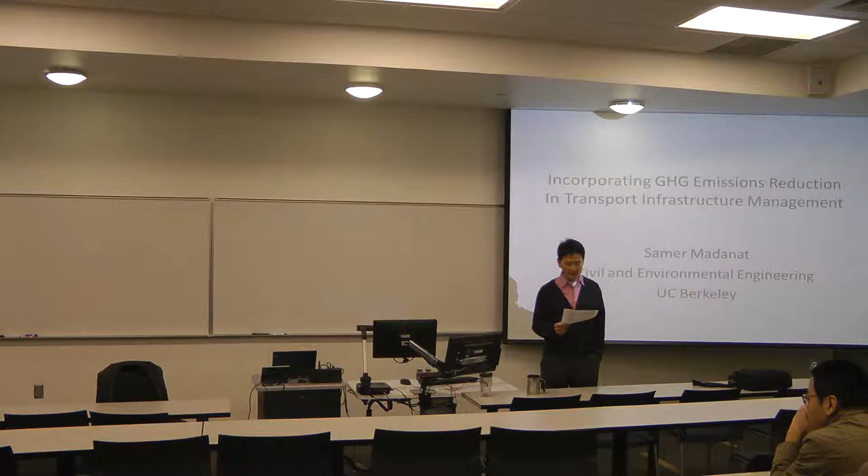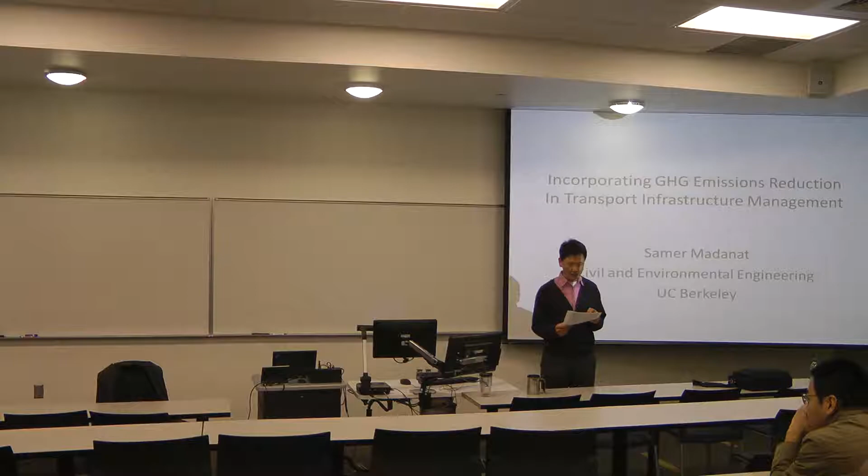From 2001 to 2010, he served as the editor-in-chief of the ASCE Journal of Infrastructure Systems. He is a member of the editorial board of several technical journals. Many of his former students are faculty members at universities in the U.S. and abroad. With that, please join me in welcoming Professor Madanat to the talk.

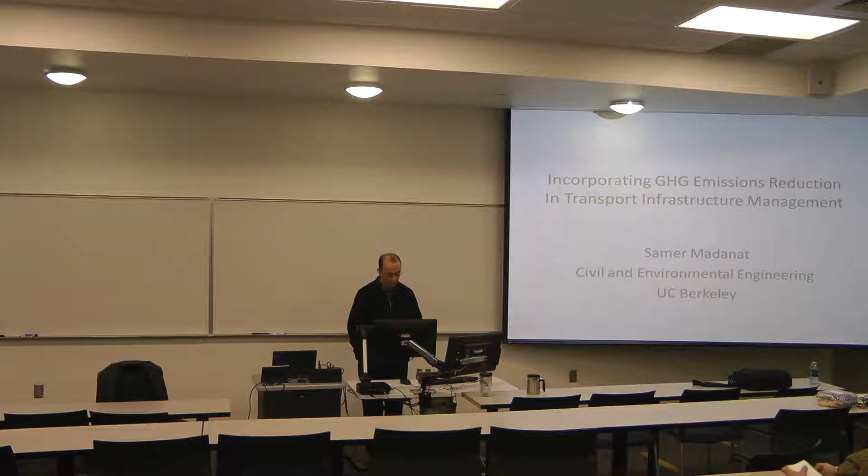Just as a point of clarification, I'm no longer director of the Institute of Transportation Studies. I stepped down this summer. Okay. Because I found that being both department chair and director of a large research institute led me to do both jobs poorly, as opposed to just one job.

All right, so when James invited me, he thought it would be interesting maybe for me to describe some of the more recent research I've been involved with collaborators at UC Berkeley at the intersection of transportation systems and sustainability concerns. This is part of a major research effort in the UC system, not just at Berkeley, in response very much to state priorities as well as global concerns having to do with greenhouse gas emissions and energy consumption.

There's been significant work done in the transportation sector on reducing greenhouse gas emissions through alternative fuels and different vehicles. There's been less work done in trying to reduce the impacts of civil infrastructure. And the type of infrastructure specifically I'm concerned with is that of transportation infrastructure, primarily highways. So the research that I will be describing looks at ways in which, through better management of existing highway pavements, it is possible to reduce greenhouse gas emissions and to find ways in which greenhouse gas emission reduction becomes part of a decision-making paradigm for the management of existing highway pavements in the state of California specifically, but applicable certainly more broadly.

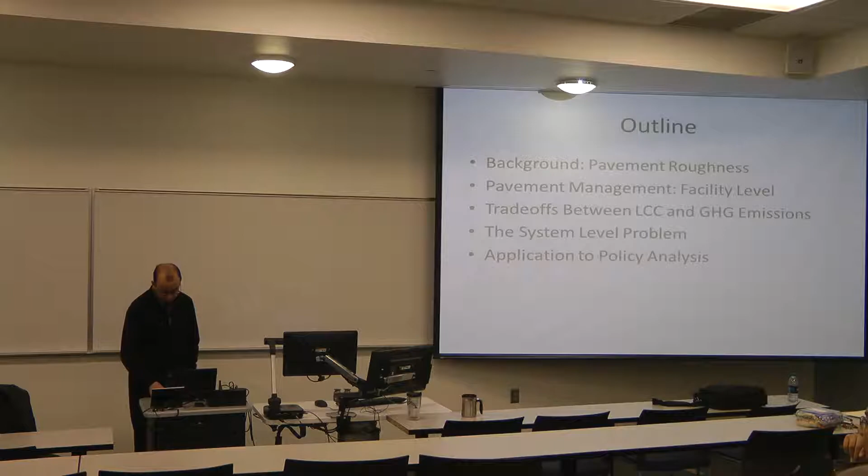So this is what I'll try to describe. The abstract of my presentation had a second component where I was going to look at a similar approach in the design of urban public transportation, but James advised me that I had less time than I thought, so I'll leave that aside and I can refer you to additional papers. So I'll talk a little bit about pavement roughness, which is very much at the heart of that greenhouse gas emission question.

Describe a little bit what pavement management is, starting at the facility level, and then bring in greenhouse gas emission as part of pavement management. First, again, facility level, then we move to the system level problem, which is the problem that state agencies face with hundreds of thousands of kilometers or lane miles, and some policy analyses that we can do with the framework that we developed.

This is a list of references that describe our work in this, and the first group of papers are relevant because these are the kind of optimization approaches that we have used in this work. Many of them were developed many years ago as part of our emphasis at that time on life cycle cost minimization. And the last two are more focused on bringing in life cycle impacts as well as life cycle costs into the decision-making paradigm.

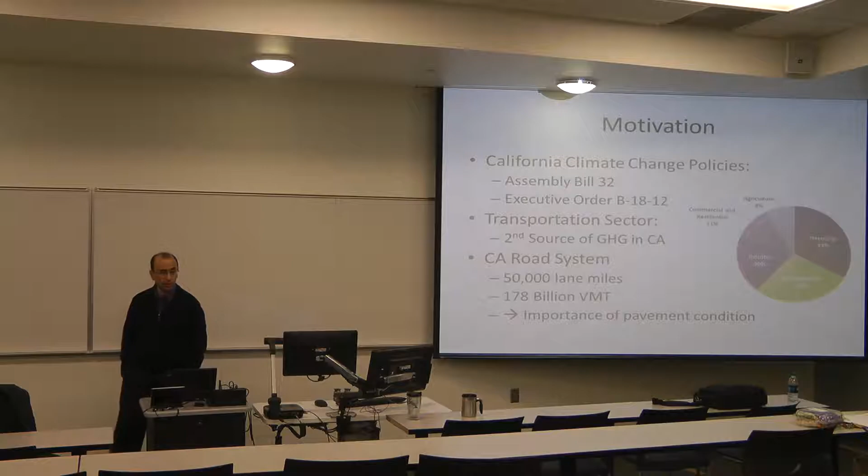So the motivation I described briefly, I mentioned the priorities in the state of California. These are law in the state of California. Assembly Bill 32 has mandated that the state of California should reduce its greenhouse gas emissions by 2020, so only in 5 years, back to 1990 levels. And this is law that all the state and in general, all public agencies, cities, municipalities, and the private sector are supposed to do their part in. There's an executive order from the governor that took this and provided additional details and additional mechanisms for making that law applicable, having to do with things like cap and trade, for example.

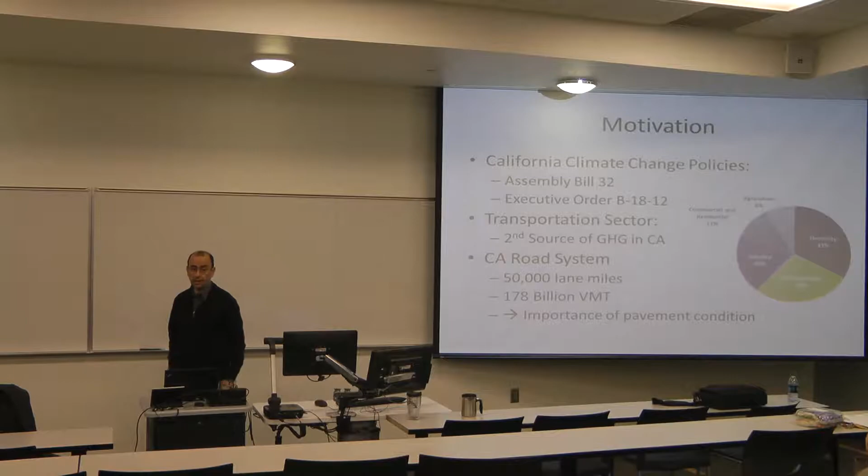Now, why is that relevant to Caltrans and to transportation? Caltrans is the California Department of Transportation, and the transportation sector in general in California is the second largest source of greenhouse gas emissions. In the US, it is the third as a whole at the national level, but in California, with its very extensive system of highways and very high volumes of vehicle miles traveled, VMT, it is actually the second largest.

So, as I said, at the heart of all of this is something we call pavement roughness. Now, highway pavements have a number of distresses and failure mechanisms. There are things like cracking, raveling, rutting, potholes, which are really an extension of cracking and raveling. All of these matter to state agencies when they're making decisions about maintenance, rehabilitation, and reconstruction.

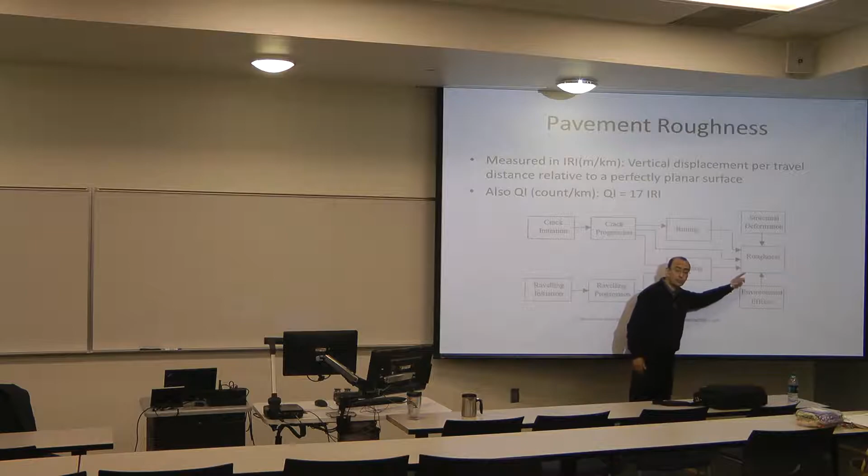But the most important measure of performance is really roughness. Roughness is an aggregation of all of these things. And it matters because this is what affects user costs the most. In particular, and of great interest to us, roughness matters very much to fuel consumption. It of course matters to things like comfort, vehicle wear and tear.

In the case of agricultural products, it leads to potentially loss and damage and significant economic losses as well for very high levels of roughness. But most importantly, in our context, is fuel consumption. Now, roughness is affected by a number of things. The structural characteristics of highway pavements, environmental effects will play a role, like precipitation, freeze-thaw cycles, etc.

Now, roughness is typically measured in most countries, including in the US and most states, in IRI, that is the International Roughness Index, either in meter per kilometer or inches per mile. And it's described essentially as the vertical displacement per travel distance relative to a perfectly planar surface.

Another measure of roughness, which is less used nowadays, is the quarter car index, and they're somewhat related. There's this approximate relationship of 1 QI is 17 IRI, or rather, no, it's 17 times IRI. So 1 unit of IRI is 17 units of QI.

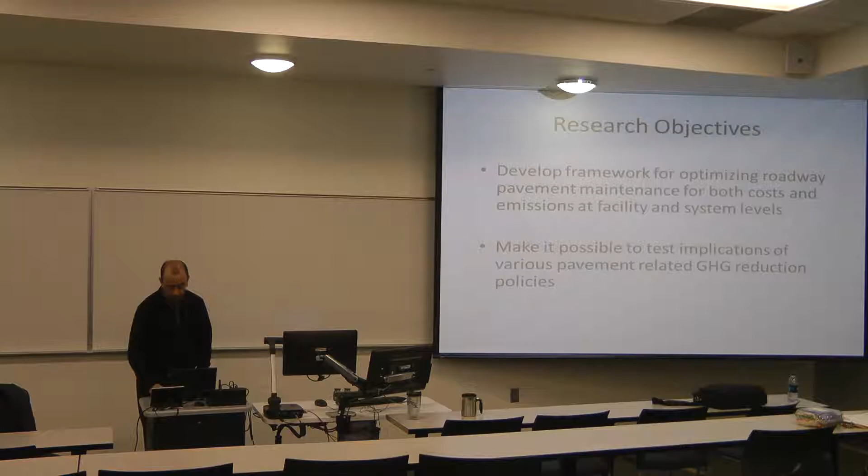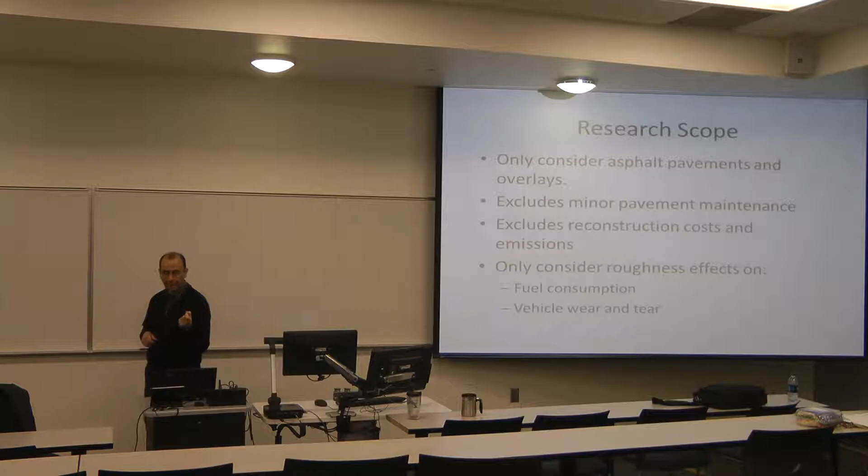So our objectives: we develop a framework that we can use to do some policy analysis, through which we can identify various means of achieving greenhouse gas reduction from the transportation infrastructure. The scope, to be precise, we're only looking at asphalt pavements, not concrete pavements, the black top, not the white top. We're not considering minor pavement maintenance or reconstruction.

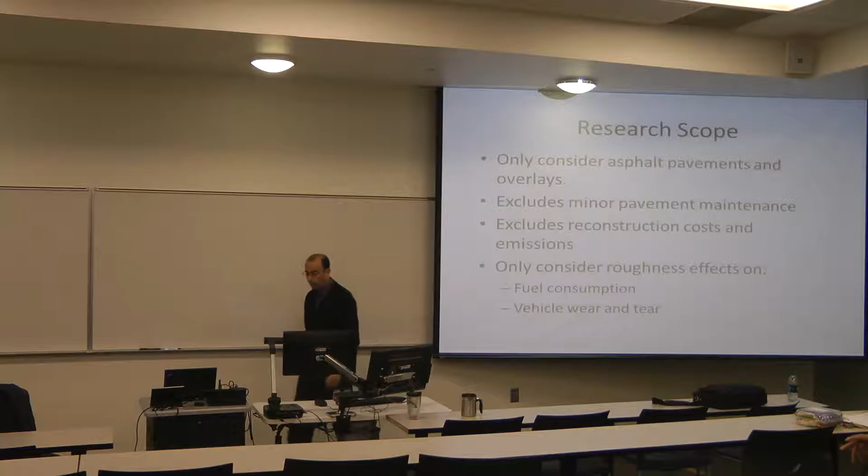Reconstruction is a big deal, but it's done very, very infrequently. And so, though in our current research we're actually not looking at reconstruction, we're focusing exclusively on overlay, not the reconstruction of the entire structure, right? And when we look at the roughness effect on the vehicles, we're looking at fuel consumption and vehicle wear and tear. Other things like comfort are not really quantified.

So, where do greenhouse gases emanate from? Typically, in civil engineering, our focus has been on tailpipe emissions. Now, while tailpipe emissions are an important part of the total production of pollutants, when one looks at greenhouse gas emissions and criteria pollutants, one needs to look at the entire supply chain of various phases of the life of a pavement and a vehicle.

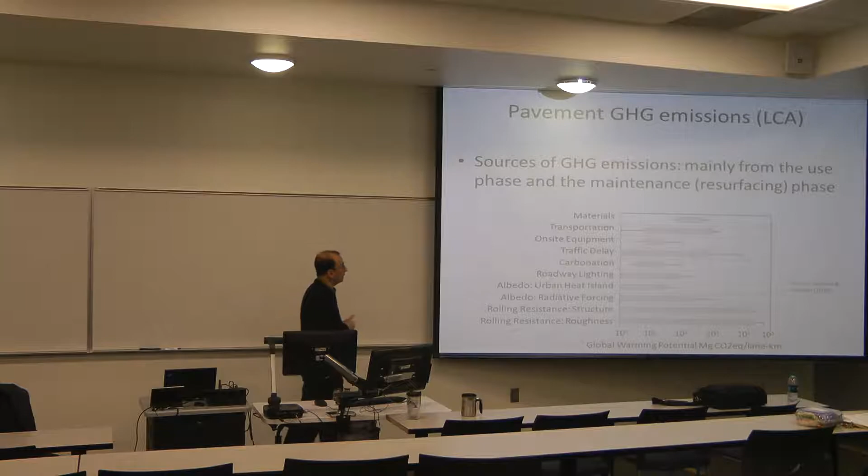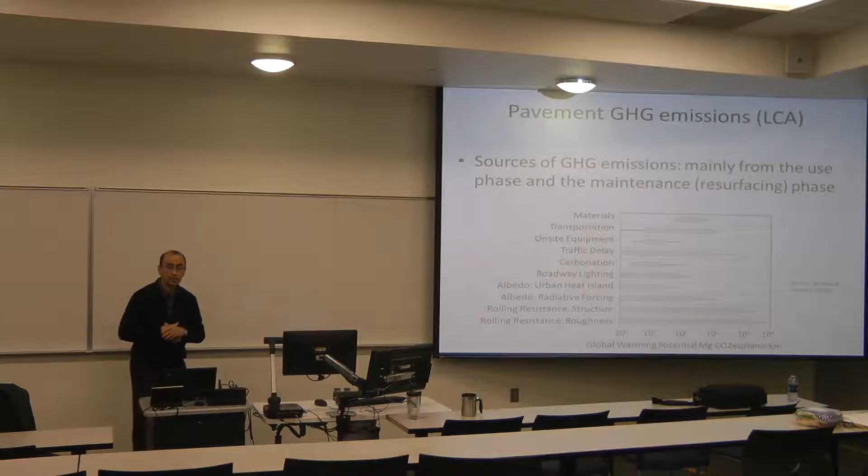So these are various sources of greenhouse gas emissions, mainly from the use phase, but many earlier, before even the use. That is, it's not sufficient to look at a pavement as it exists now, but to look at the entire process of materials extraction and production, all the way until the use phase, and in the case of vehicles, what happens to those vehicles after you no longer use them.

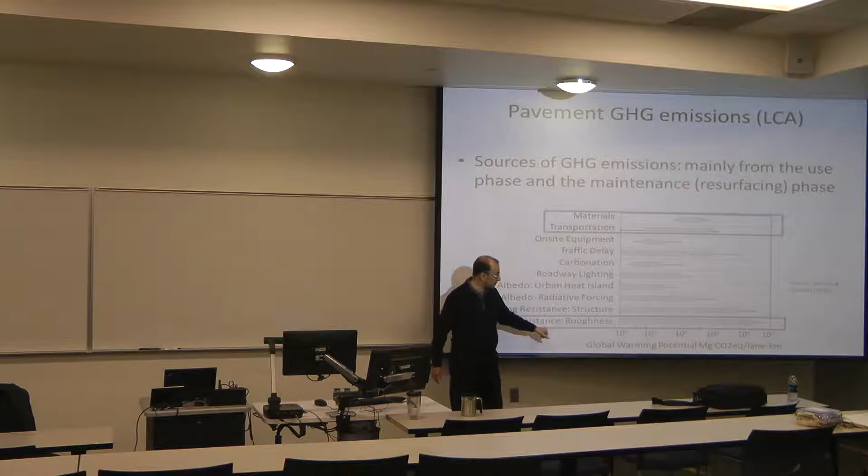Now, this is from the work of Santero and Horvath at UC Berkeley, the biggest sources of greenhouse gas emissions. The materials used, so the extraction and production of materials used for the construction and overlay of pavements, and their transportation from their sources to the sites. So this is on the overlay, on the agency side. On the user side, we're going to focus essentially on rolling resistance and roughness.

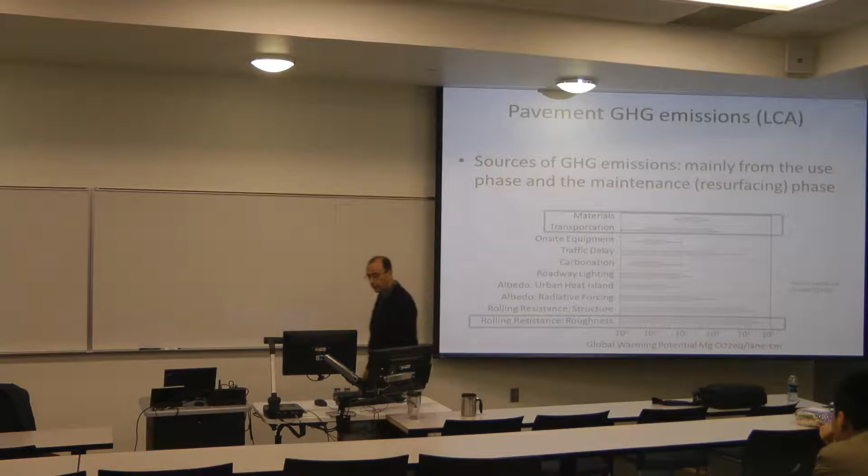Just to point out, this is a logarithmic scale. So these smaller things here are not very significant. And there are other significant things, for example, the structures. This has to do with vehicle tire to pavement interactions, dynamic load, and how the pavement itself is modified by the application of loads. While important, it is not the roughness question, and this is not something we're going to consider. All right, so that's the big picture.

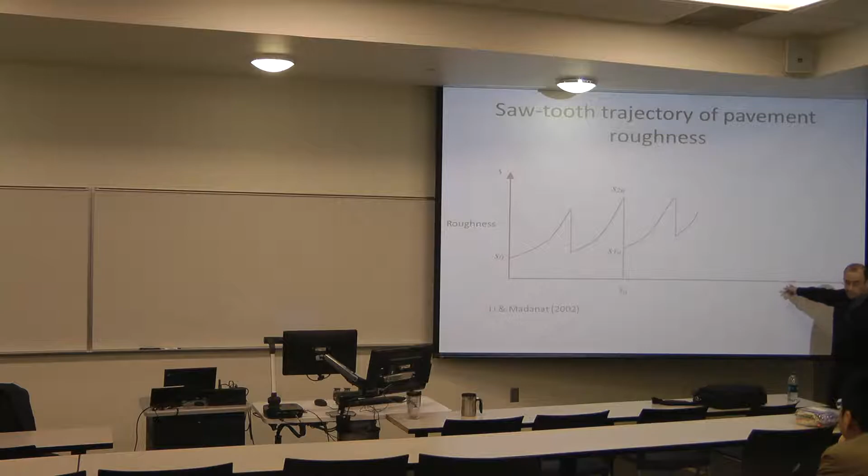The objective is a minimization of life cycle costs only, LCC, over either a finite or infinite horizon. LCC here includes the entire series of user and agency costs. This is a kind of traditional, typical sawtooth curve showing roughness progression over time. Roughness is on the y-axis, and this is either time or the accumulation of loads. Roughness increases, you do an overlay, it decreases, etc.

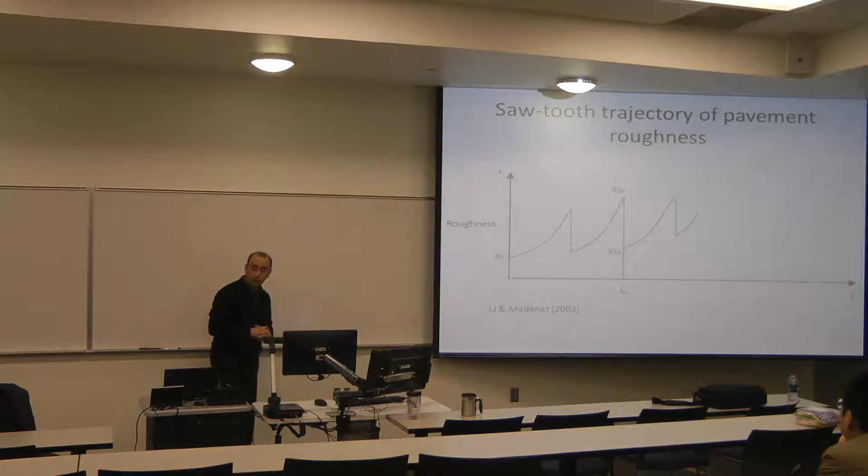So the question is, what is the threshold? For example, what is that number, S2N, at which you overlay? And how much should your overlay be? That is, how low can you come? You can never go back to a new pavement. An overlay does not bring you back to that. You need reconstruction for this. But how low can you get? So either how often do you do it, or what is the threshold, and then what's the intensity?

So this is a standard nonlinear minimization problem. Let me show the components and go through the notations. Basically you're minimizing the sum of the user cost integrated over time plus the agency cost associated with those overlays. You have a deterioration model, which is that first constraint, something that describes how the pavement roughness increases with time and as a function of the current state. You have an improvement function that describes how much down you can go depending on thickness and some initial conditions.

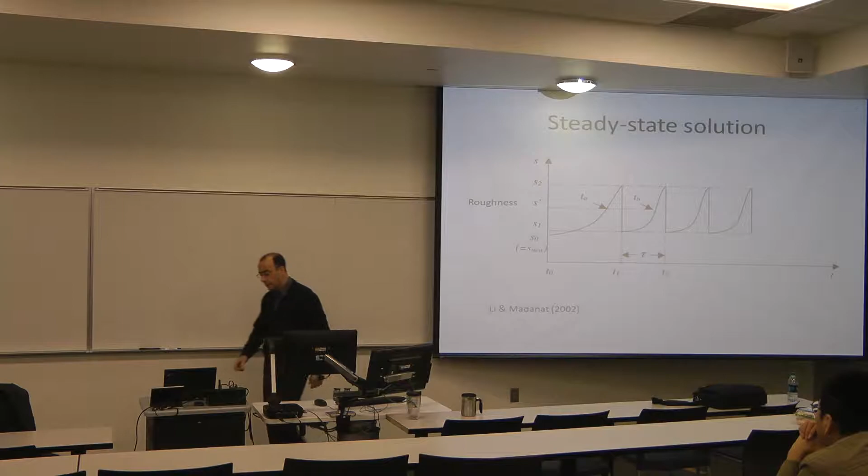The reference at the bottom shows the solution of this problem. For an infinite planning horizon, not surprisingly, you end up with essentially a steady state solution after the first resurfacing. It identifies for you S2, that trigger roughness, for different types of pavements, of course, and it also identifies the level at which you should resurface. Let me actually skip this.

A major insight from this research is that the optimal strategy turns out to be to resurface with a fixed intensity. This is again for steady state conditions, so constant traffic over time, no traffic growth, simplifications of this nature. You resurface with fixed intensity whenever the pavement condition reaches a specific threshold, and the intensity you use is the one that achieves the minimum possible roughness, because technological constraints prevent you from getting essentially to a new pavement condition.

We also found, this is a slide I skipped, that the optimal solution turns out to be quite robust to uncertainty in the deterioration model. And that's an important result because much of pavement management systems today are actually based on probabilistic deterioration models, which is good. But for this particular problem, which is a small part of PMS, or pavement management system, that is not so important.

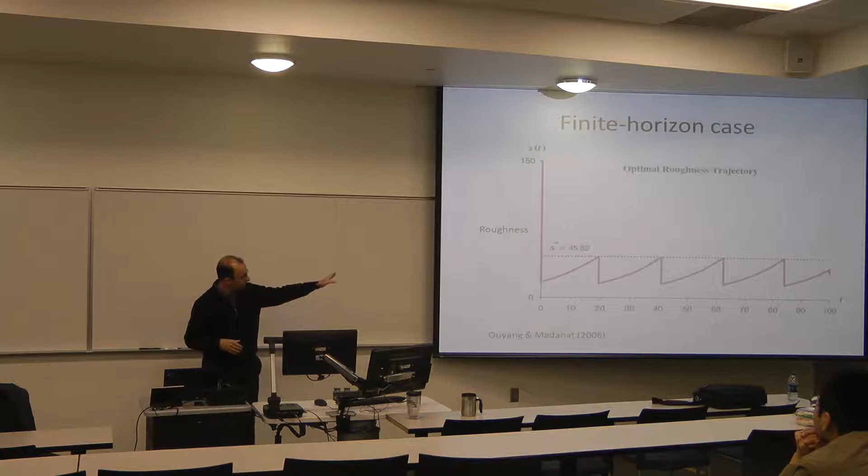There's an equivalent problem with a finite planning horizon, described in the reference at the bottom here. And the insights are very much the same. That is, you do end up with a steady state solution, except at the beginning and at the end. And there's also a trigger roughness, and you resurface with a fixed intensity, which leads to the maximum possible reduction or the minimum resulting roughness. So again, there's robustness to uncertainty. Right. So this is how we go about coming up with these optimal policies, that optimal trigger roughness.

Now let's bring in emissions. So we said in the case of cost, there's a trade-off between agency and user. In the case of greenhouse gas emissions, there's also a trade-off, which is somewhat similar. So if you have on the x-axis the overlay interval, that is the interval between two successive overlays, and you look at CO2 equivalent emissions on the y-axis, the longer the interval between overlays, the roughness emissions are going to increase.

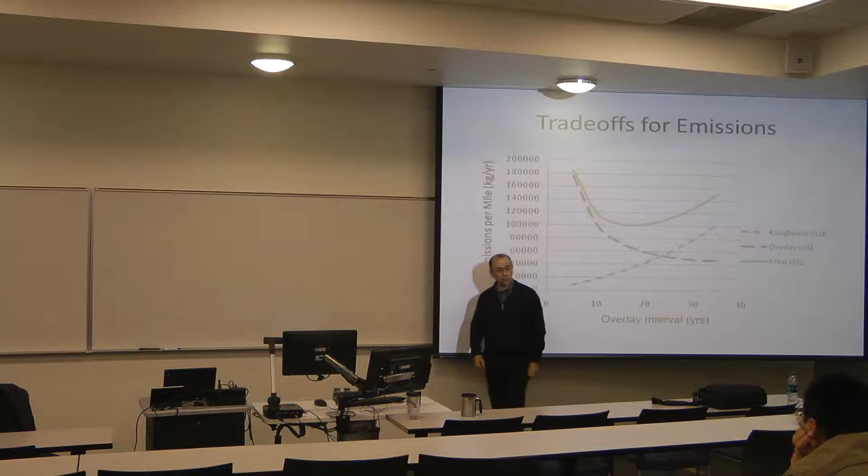Right? That is, if you do overlays every 10 years, your roughness is never going to grow very much, and therefore user emissions are not going to grow very much. But as you extend the period between overlays to something like 30 years, then the user emissions obviously are going to increase, while the agency emissions obviously are going to decrease. Somewhere in the middle, there's a sweet spot, and if your only objective in life is to reduce CO2 emissions, you would go to that global optimal, and you would use that as your overlay interval.

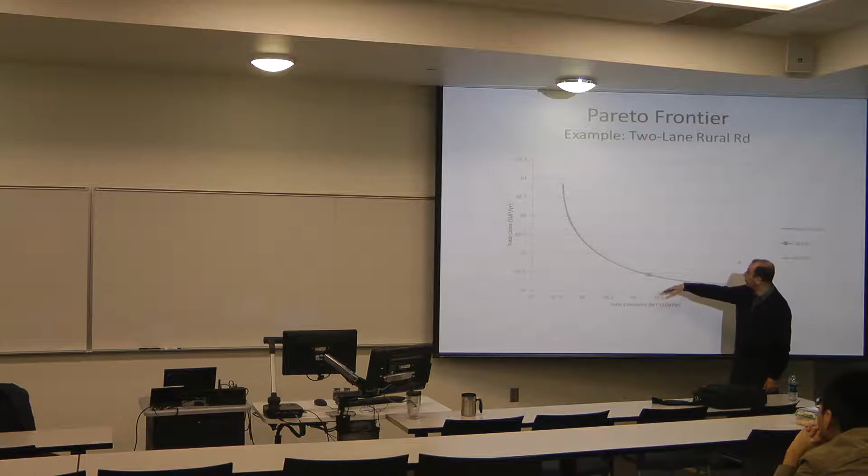And the Pareto frontier is described here with emissions on the x-axis and costs on the y-axis. And what the frontier shows you is the set of optimal solutions in that optimal span, right? So essentially you can never be below that frontier. This is the best that you can do, but you can certainly be above. Now we applied this concept to a very specific two-lane rural road in California, and what we find is that Caltrans happens to be doing a hell of a job. They fall on the frontier, at least with their current resurfacing policy.

I always like to show this slide first when I go to Caltrans to put them in a good mood.

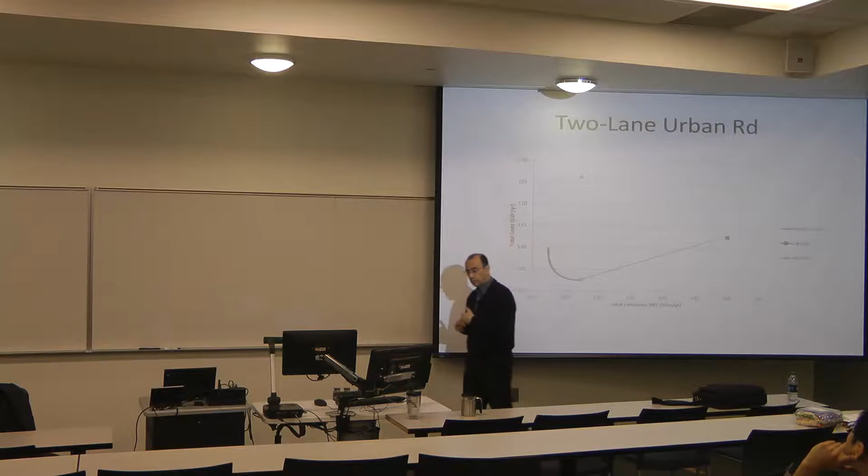Now it's important to realize that Caltrans actually doesn't use an optimization. They have this threshold of 2.7 meters per kilometer. Right? And so that threshold is not optimal, whether in terms of cost or in terms of emissions. The policy they used to have earlier isn't much better, but maybe somewhat better.

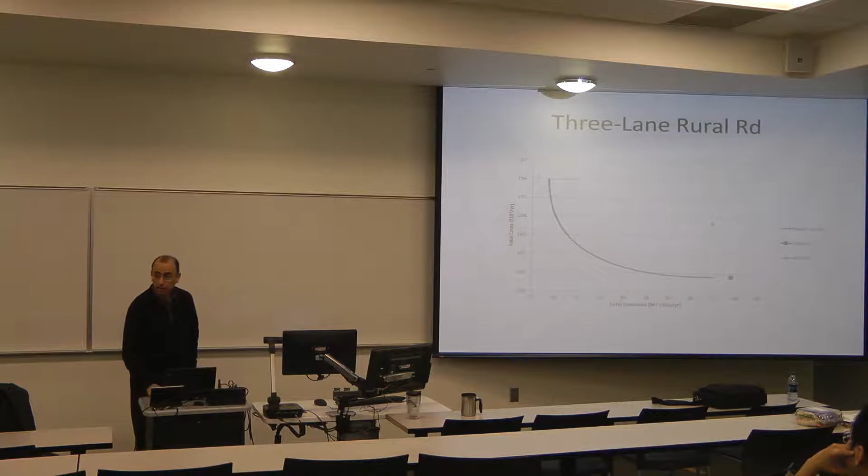Same kind of observations when you're looking at 3-lane rural roads. Again, Caltrans does very well there. If you extend that frontier, they're on it. And again, in urban roads, it's not a good solution.

So, all right. So this is kind of how you bring in greenhouse gas emissions at the facility level. Caltrans really doesn't care about this because they're not concerned with managing individual segments, but with an entire system of pavement segments, tens of thousands of kilometers.

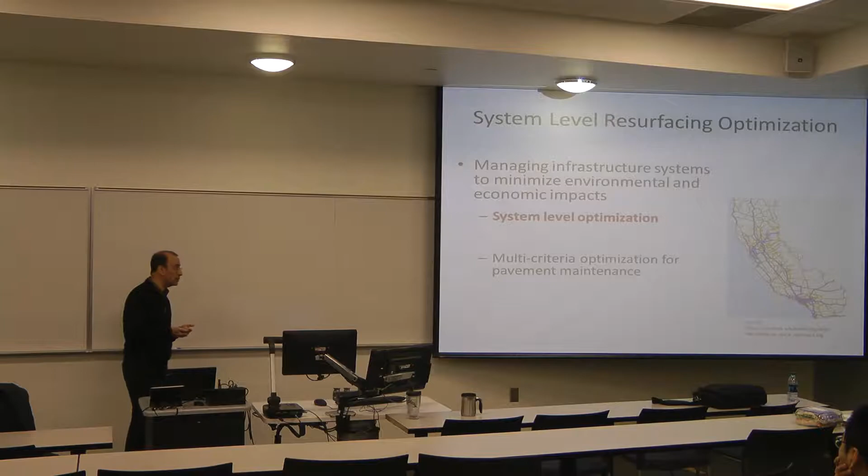And the problem is different because it's not sufficient to just take the optima from each segment and collectively use them, simply because you have system-wide constraints, in particular budget constraints, that make it such that the collection of optimal solutions is not itself optimal, right? Even the budget constraint. So this is a kind of constrained optimization problem.

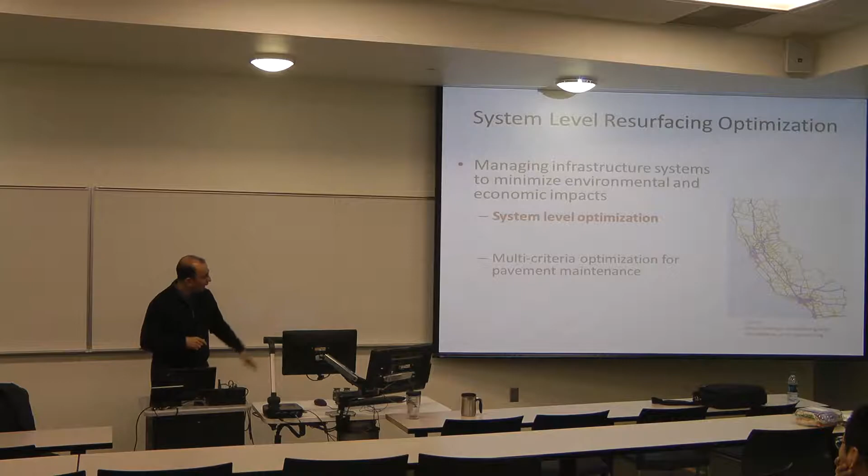And what we're going to first talk briefly about is how we approach this problem, and then later how we might bring in greenhouse gas emissions as well. So again, going back to focusing only on cost, the approach we'll use, let me just say 2 words, is known as bottom-up.

Okay, so most pavement management systems currently use a different approach, which is top-down, where we come up with an optimal solution, identify fractions of their network that should be maintained, and then let the engineers map those fractions to individual segments. Our approach is bottom-up in that we start at the segment level,

and the advantage of it here is that when you start at the segment level, you can maintain the identity. You can use very detailed models of individual segments instead of some generic models that describe the entire network. All right? But then we go up, and now we have to face the budget constraint. It turns out this is a resource allocation problem, but let me graphically express how it works.

So let's say that we've used the optimization methods I described briefly earlier to identify thresholds for all these segments in the state of California or in certain districts. So the optimization gives us, as I said, a trigger roughness for each of these segments. And some of them deteriorate maybe faster or have a lower trigger roughness, some have a higher trigger roughness, etc.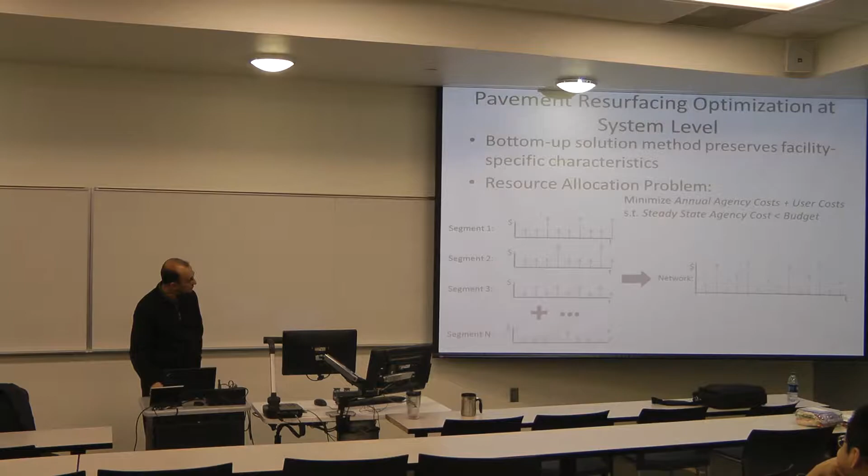So we can add dollars, and we might get at the network level something like this, right? The problem, of course, is that there's something called a budget constraint. And the budget constraint makes it such that, typically in most years, again here I've shown only the agency cost, you could not apply the collection of optimal solutions.

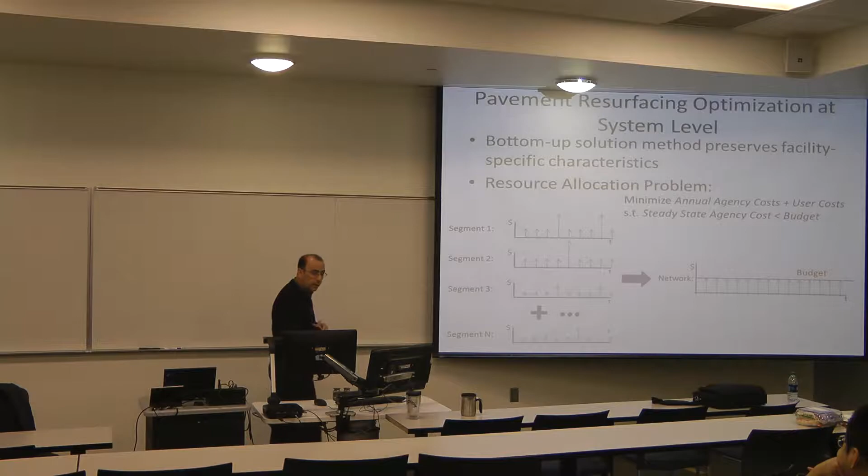And what you need to do essentially is to reduce or redistribute your expenditures over time so that you just use the budget and you use all of it perfectly. Now, how do we do that? Well, what we've done essentially is to adjust the trigger roughnesses of the individual pavement segments up or down, right? So that what we end up with is something that, on a uniform basis, over time, matches

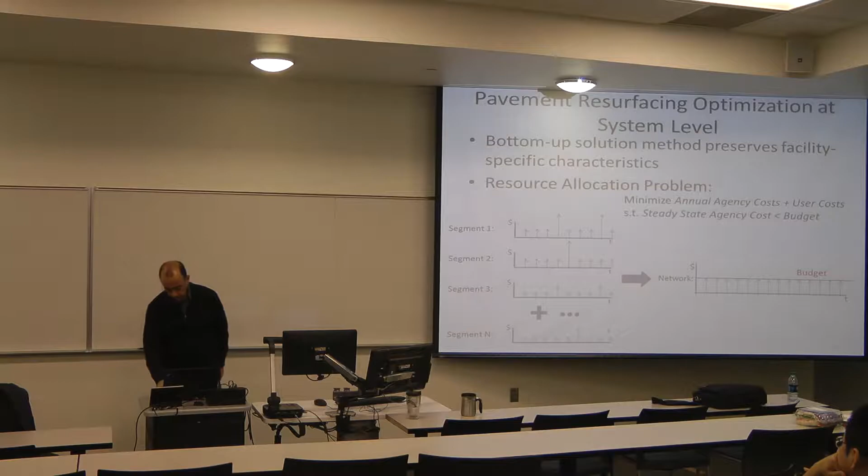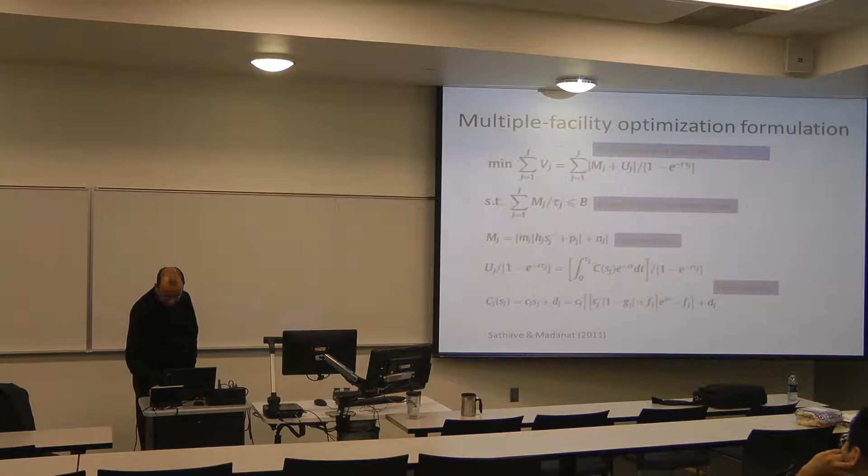the budget constraint. So the way that it's done formally is by solving this nonlinear minimization problem with the following constraints. Briefly, the first one describes agency and user cost. This is the budget constraint. And then there are agency cost, user cost, etc. And this work is described in this paper cited at the bottom. I'll skip through the solution algorithm itself, just to show you some interesting results.

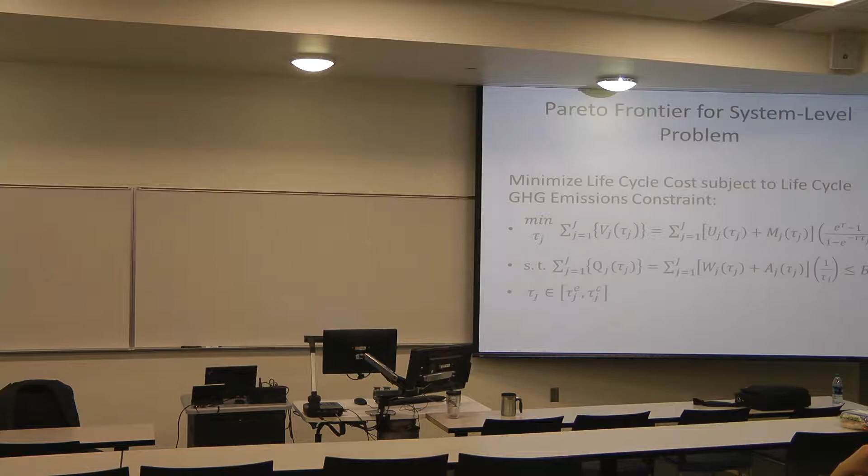Again, though I'm not showing it here, it turns out the solution to the network level problem is quite robust to uncertainty as well. So this is as far as life cycle cost minimization is concerned. Let's bring in now the greenhouse gas emissions. So again, we're going to approach this as a multi-objective, two-objective minimization problem. The formulation looks very similar, but we're going to be minimizing cost, and we now also have a budget constraint in terms of emissions, if you will.

So the way to think about this is, let me show you this. The way to think about it is that I'm trying to minimize this, but I cannot exceed a particular emission budget, right? So similarly, we obtain a Pareto curve. And the Pareto curve gives us what is optimal to do at the system level.

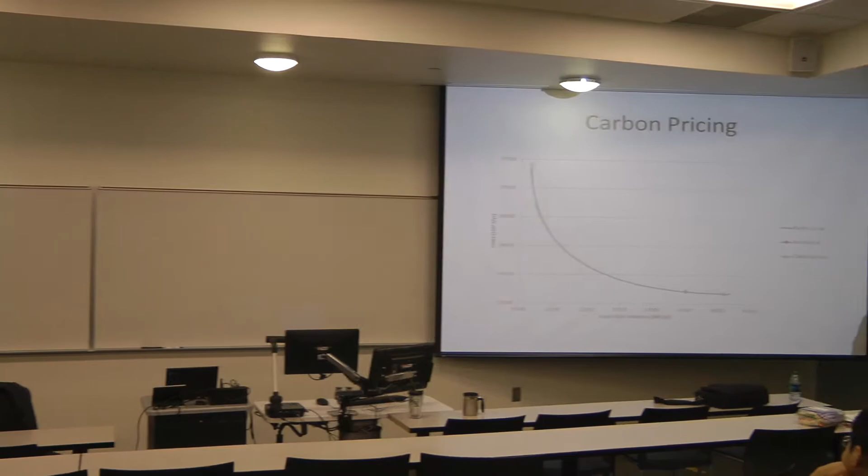So what can we do with this? Well, the first thing we can do is start talking about the price of carbon. With every point on this curve, there's an implied carbon price. The slope of the tangent at any point here is effectively the implied price of carbon at that point. So if Caltrans or the state of California were to decide that this is where they'd like to operate, with this combination of trigger roughnesses, then the slope of the tangent at that point is the price of carbon. You can see that by the units, cost per metric ton.

And so we use some of the prices found in the literature. The first point is what we call the California price. It's the price that came up in the second carbon auction done in California, as part of the cap and trade system, and it was about $10 per metric ton. It's not very high, and it means that the solution that attempts to only minimize cost is not far from where California will be operating.

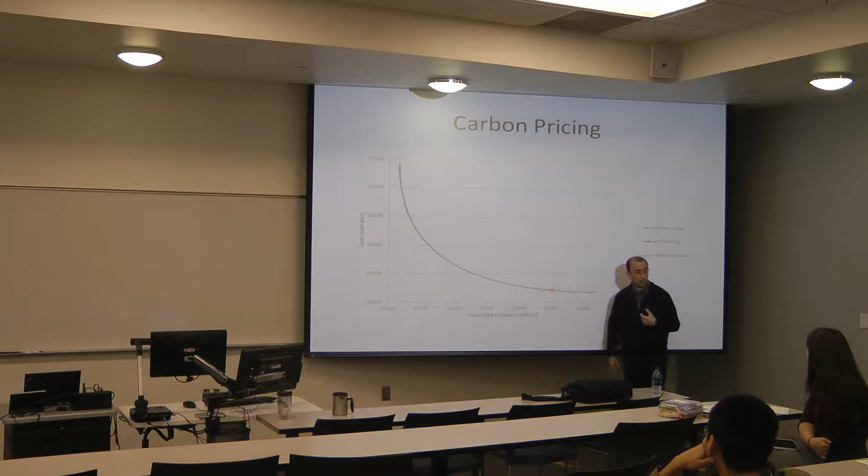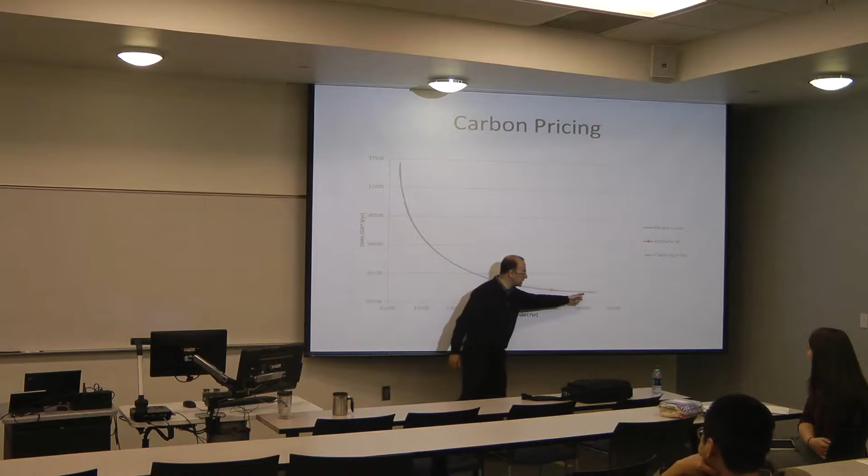But essentially, if you were to look at the market, this then sets a price. If this is the price of carbon, then this is where you should operate. If society decides that this should not be left to the market, and there needs to be some other non-market mechanism, for example, like that represented by the red point, that is where you should operate.

Some policies we can look at. Caltrans has this approach where they overlay all the lanes associated with a pavement that reaches a certain trigger roughness. One thing they've been considering is to only overlay the rightmost lane. Typically the rightmost lane, which carries most of the trucks on a highway system, is the one that reaches the trigger roughness way before the others. So one possibility is to only overlay that rightmost lane, or the two rightmost lanes, those with higher roughness.

If they did that, the Pareto curve would look very different, and in fact they would be closer to optimality. Here's what would happen if technological improvements made it possible to reduce the minimum achievable roughness. The minimum achievable roughness is the roughness after the overlay. This is the technological limit.

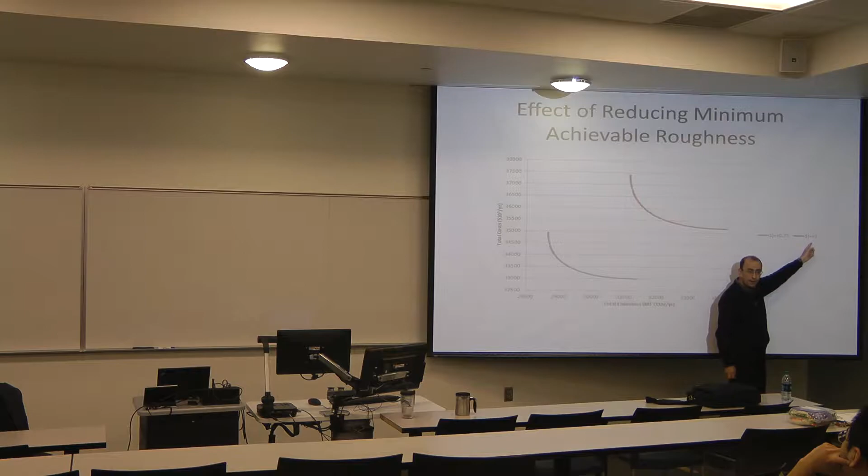So if it were possible to reduce that through material technology improvement, the entire Pareto curve would move. This is a minimum achievable roughness of 1 IRI. If, as a result of an overlay, we could bring roughness down to 0.75 IRI, the whole Pareto curve would shift closer to 0, leading to better optimal solutions.